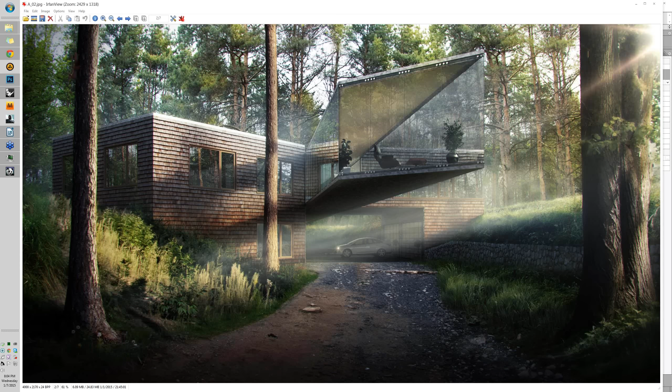Okay, so here's the model, which is already prepared for the final rendering for myself. Some of you ask me when I feel the model is ready for the final render and post-production. I would say, depending on your post-production skills, it can be right after creating a simple box in clay.

It really matters what you need to reach in post-production. You can always go in two ways: one is a full 3D approach, the other is a full 2D approach using post-production. There are several leading companies doing this.

Some companies are doing mostly 3D. You all know these people - like Bertrand Benoit, Marek Denko, Juraj Talčík, Peter Guthrie, and so on. On the other hand, there are other companies creating amazing visuals where most of their work is done within Photoshop post-production.

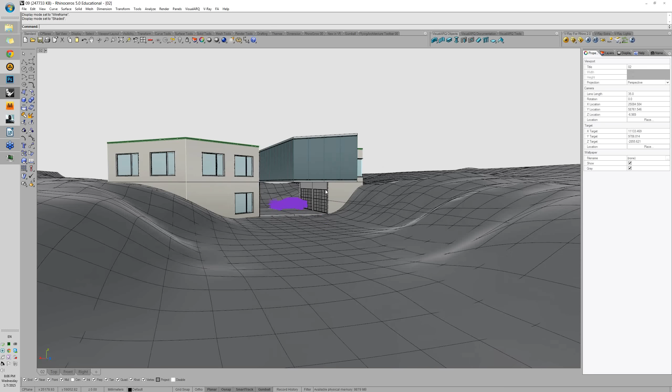So it's really hard to say which way is better, and hard to say at which point in the work it's better to stop working in 3D and start working on post-production. You really have to feel it in your workflow. You'll have to try creating several visualizations, mostly in 2D, mostly in 3D, and compare if it's better to add 3D trees or 2D trees. It really depends on you and your skills.

I will show you in our session how to avoid really long render times and how to avoid using a lot of 3D assets, using 2D assets from photos mostly in your visualizations.

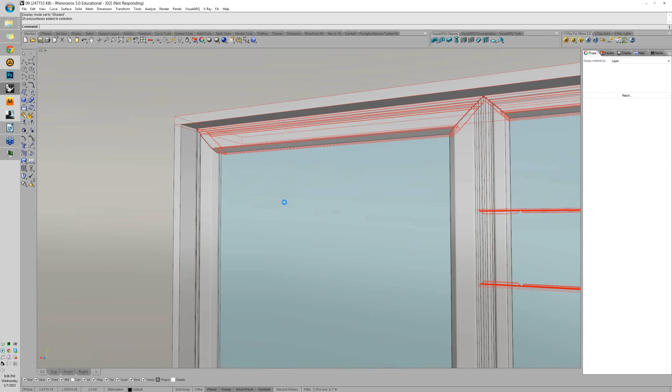But first, let me show you how we handle some of the basic modeling tasks here. For example, I decided to show you the windows, because I think they might be interesting for you, as we try to reach a lot of detail in 3D if possible - we never know when our client will ask for other views or a close-up.

So I'll just invert the selection and hide it, isolating this object within my 3D scene. As you can see, there is some decent detail created here. This is not complicated - it's very quick, very fast, and you can do it within a couple of seconds or minutes.

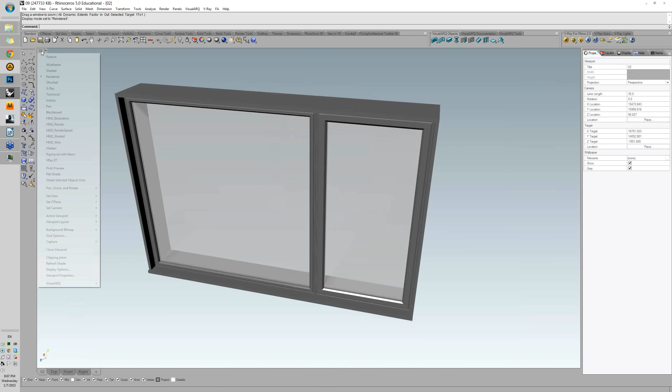Let me show you how you can handle such modeling in Rhino. So let's just create the outline for the window first. In this session, I will not care much about the real dimensions - let's just eyeball some of these dimensions. First I created the rectangle, which represents the outline for the new window. As a second step, I'll create the section for the window.

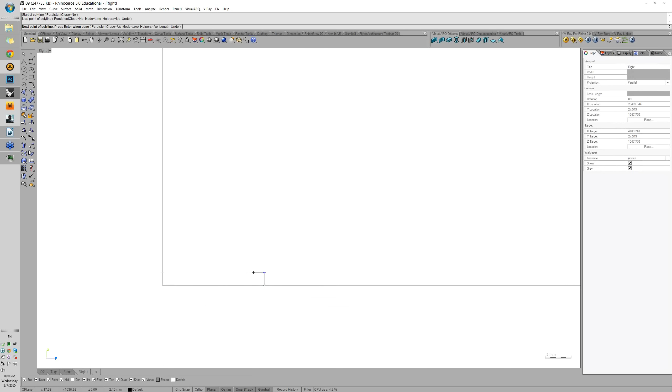Always mind, I have the project option enabled, which means I'm not drawing into 3D space, but staying in a 2D space. Okay, let's create some random detail. First it's okay to just have it like this, and then it's always possible to edit it later. If you enable the control points by pressing F10, you can select and move any of these points to edit the shape at any time, so it's really easy to edit later.

As the next step, it's important to add some fillets, because we want nice specular reflections on the edges - otherwise we wouldn't get these reflections. So we'll just use the fillet command. Anyway, as you can see, I'm using the commands.

It's quite faster for me because I was migrating from many 3D softwares I used before, like Cinema, Blender, 3ds Max, SketchUp, and so on, and these icons are always misplaced in different versions, or even different versions of the same software. So this new software layout in Rhino 5 isn't really important for me, because I mostly use the command line and try to type the commands. So I take the fillet.

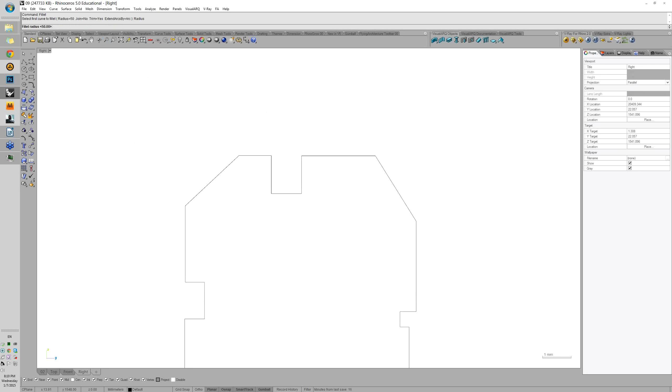Okay, as I can see, I chose a really big radius. Let's go with 1 and 0.5, so I'll just create some more fillets in here, like that, and so on. This is how you create these fillets.

Why is that important? I already told you - it's to get the proper reflections and proper detail.

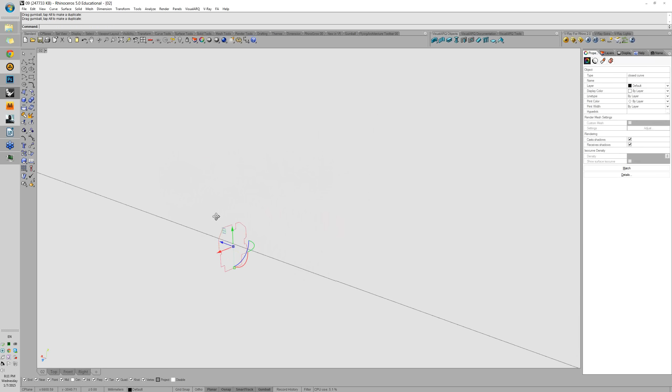Let me move the section in here. As I can see, it's downscaled, so just make it a little bit bigger so we can see how it works. Always try to keep the real dimensions, so this should be like 10 centimeters high, while the window should be maybe 1 or 2 meters by 2 meters or whatever.

So let's take the section and move it, disable the project, and move it somewhere onto the outline. As the next step, we are going to create a sweeping command - sweep 1. So we will take the rail, which is the outline, and select it.

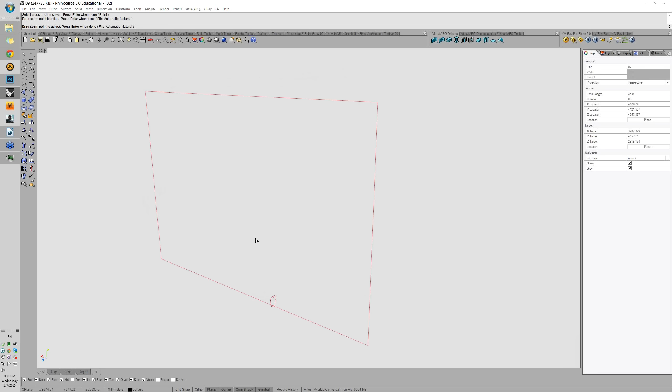Then it's asking to select cross-section curves - it's this one, as I told you. So select the cross-section curve, OK, OK, and hit OK. That's almost it for the window, of course.

If you go to rendered mode, you can see we are already getting some nice detail in here, which would be good later for the rendering.

Let's go back to shaded, and if you have a look in here, if I delete the section curve, I can still see there is a seam of the surface. So what happens? Let me also delete the outline, the curve, delete, okay.

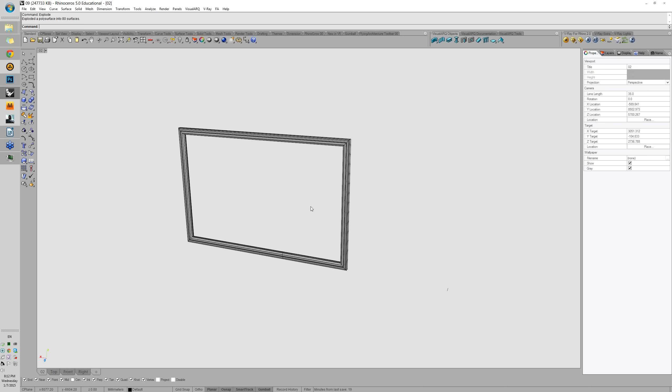So what I have in here is a closed poly surface, which is really important. What happens if I explode this poly surface? I'll get a set of surfaces - vertical surfaces in here, in here, in here, and in the bottom it's split in this part where I had the section.

So what I usually do, as I want to keep the model really clean and nicely editable, I just delete the bottom part. Then I join the top part, join the side parts. As you can see, it's already an open poly surface, all of them.

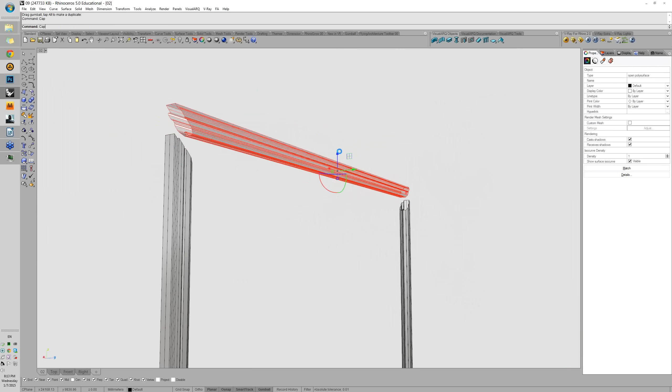As the next step, I can use the command which is called cap. If I hit cap, you can see it became a closed poly surface. So once again, if I go back, move it up, and use cap, as you can see, the cap was created - to close the surface, and it becomes a closed poly surface, and the same with the sides.

And as the last step for this window frame, I'll just mirror it using the middle point in here - it's in here, like that. So it's recreated back in here without the seam which was there when I created the first frame.

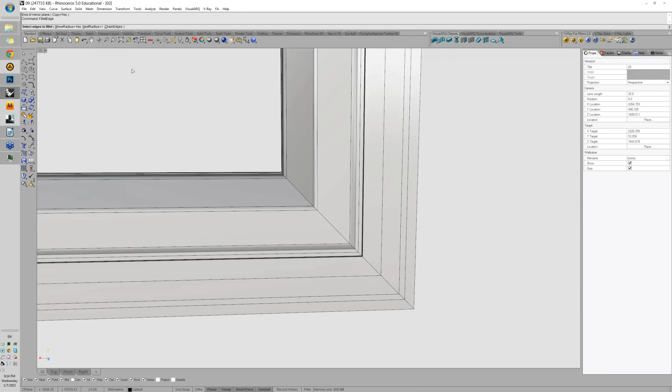Okay, as the last step for this frame, there would be the next step, which is filleting the edges of the connection in here. So let me use the fillet edge command with the radius of 1, should be okay. Let me try that one. I guess we don't need to fillet it in the middle in here to create an artificial detail inside, so it's okay just to leave it here.

Depending also on the details in here, it should be done flawlessly. Let's see - okay, it's auto-save, and I'm creating the scene inside the original file, so maybe it takes some time, which I'm sorry for.

Sometimes it might happen that you get some problems in these edges, as for example, you may use a really large radius for small details in there. In that case, it's okay just to lower the radius, let's say to 0.5 millimeters and so on, and try it once again, and it should be done flawlessly.

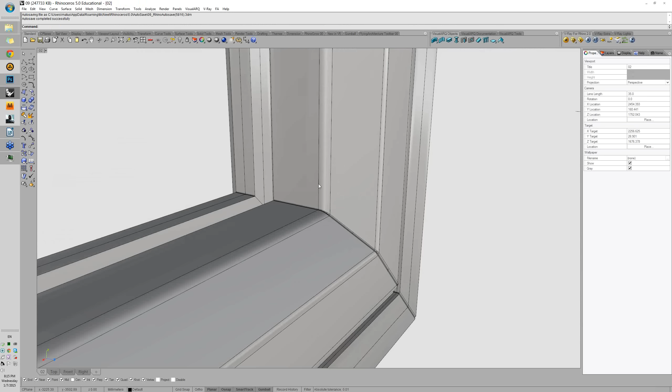It's always good to check out the surfaces if it's a closed poly surface. This is a very important part, and the reason why it's important is that if we do not have a closed poly surface where it should be, we would get an open poly surface, meaning that poly surface would have some holes in itself. We do not want holes in the poly surface, as there would be some light bounces coming inside the object, causing not really nice effects in the rendering, like light splotches leaking, and it would happen around the edges.

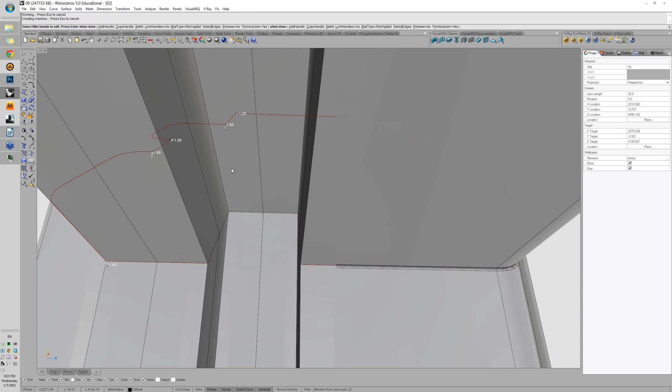So always select the object, always check out if it's a closed poly surface, and only if all of the objects in the scene are closed poly surfaces, then be satisfied with the scene and go to the rendering, to avoid all these unnecessary problems you may get.

Okay, let me see the rendered mode. As you can see, the detail is already pretty nice - yeah, I would say I'm pretty satisfied with it. And as a last step, it's okay just to add the window inside and the glass pane, so let's just create a simple box, get inside.

Okay, like that, put there the glass, and it's done. If you just group these objects together, it's easier for mapping later on. I'll show you also directly how to map groups like this for better detail.

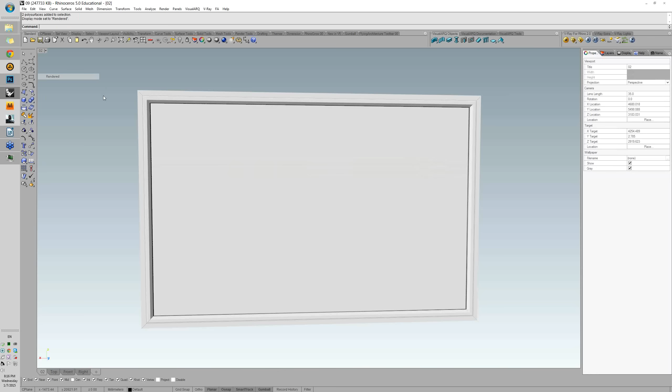Let's go back to the render mode. For the glass, I'll only create a very simple Rhino material with some transparency in it. I can see it's already transparent. Let's see that in there. Let me apply the material. It should be, yeah, okay. Shade it, I'm going to show.

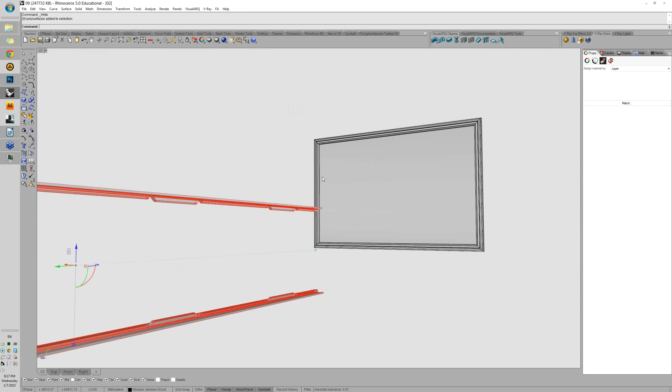So I'll just take the material from here. Okay, it's layer. There's a really nice icon in the latest V-Ray release. There's this tab called V-Ray Extra, and there you can see this icon which says V-Ray Edit Material. That means if you select the object and click on that icon, it's going to take you directly to editing of the material itself. So let me just click on the icon and select the object. Okay, I want that one.

And as you can see, I'm already in here. So let me just hit preview. I just want to make sure all of my textures are okay. Seems okay, so let me just hide this part. And if I select the frame and apply the material to selection, I'll make sure it's working in rendered mode. Okay, for some reason I cannot see it.

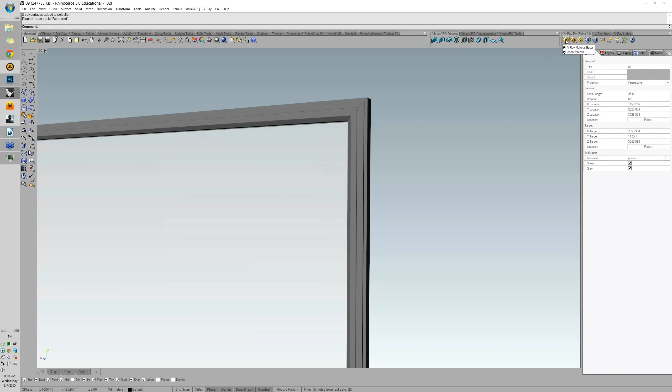Oh, I know what's happening. The reason why I cannot see that is I've got not a simple bitmap in here, I've got a color correction where I'm desaturating the texture. So first of all, I'll just create a simple bitmap material, just the standard, and I'll take the location from here.

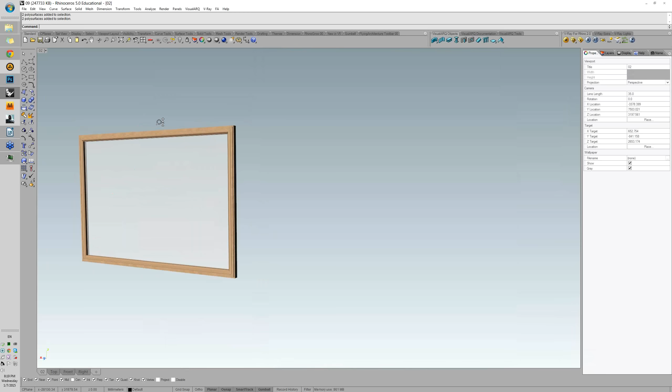Okay, let's go back to the diffuse bitmap. I'm going to take the texture. I'll select again the frame, apply material to selection. So as you can see, the material is working now, but the mapping is wrong, of course.

So as the next step, I'll disable the isocurves, so I just remove some of the lines in here and keep only edges. And as a next step for mapping, I'll create the box mapping. It's pretty easy, just create a box, doesn't matter how big it is, we are going to change it.

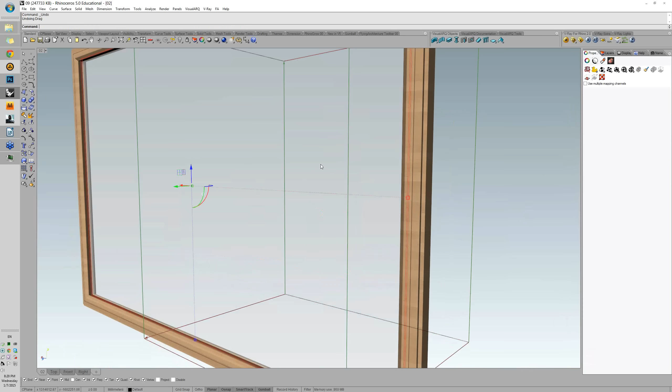Select these vertical lines, then click on show mapping in here, so it's going to show you the mapping widget. And now, as you can see, you can freely move it, and the texture on the surfaces is moving with the widget in real time. So you can easily rotate it, and as you can see, we are already getting some nice and realistic mapping.

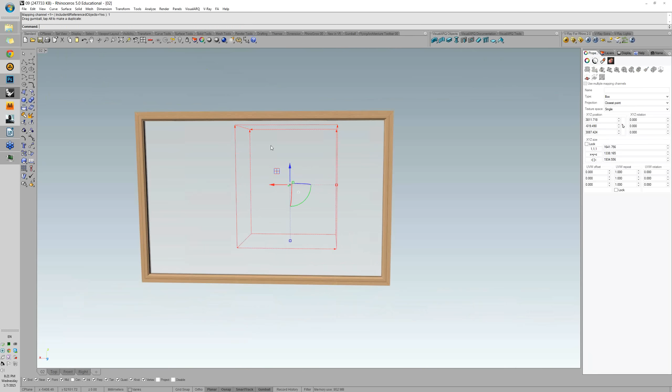On the windows, okay, this should be maybe okay, but as I can see there is some seam in the texture there. So let me just scale it up a bit, move it down. Should be okay now, let's see the surface. Okay, looks okay now. By hitting escape, we just cancel the widget while the mapping stays as we set it up, then just do the same for the horizontal lines, take it in here. Okay, this should be okay, just scale it up. Let me check it, okay, it looks okay.

So using this very simple method, in a couple of minutes you can create really nice detail for the visualization, and even if your client asks you to make a close-up, let's say through the window, you don't have to be ashamed of the really simple geometry you've got there. As you could see, with really simple steps you can make some really nice and detailed models.

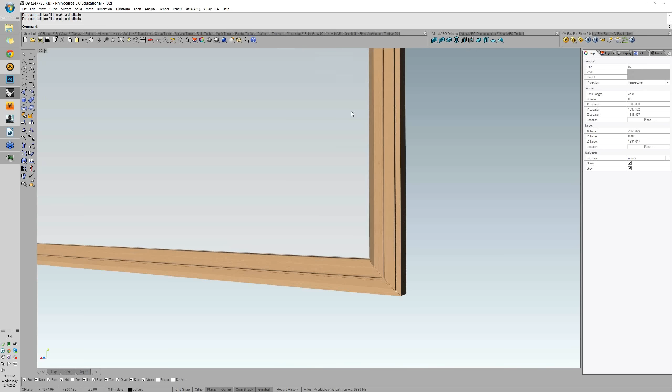Also, if you just want to quickly adjust the size of the window, remember, never scale the windows up or down, never scale these frames, because if you scale it, these vertical lines are going to get distorted since it's scaling them in one direction. So how do you avoid this?

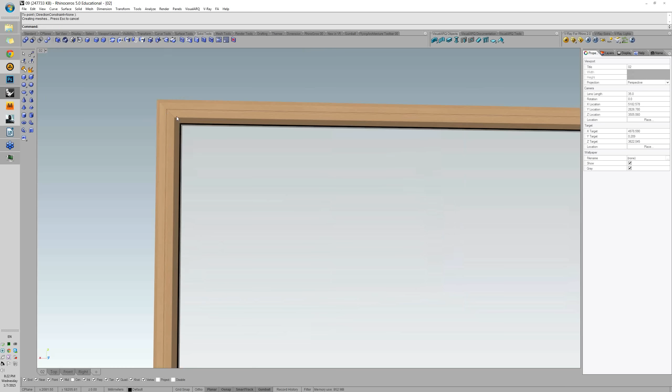Go to the top view or front view, whatever, and go to this Solid Tools panel, and there is this little icon which says Move Edge. So if you just select the edges and move them to the new location, the window gets shorter and all the proportions are kept the same. So remember to use Move Edge, and never ever scale the windows up or down again, you're always going to get distorted geometry, which is not good and not realistic.

Okay, so this should be it about some details in the model. I'm going to delete it. Going back to shaded mode, I'll show you how the model looks like again. As you can see, there is some repetition on the cantilever in here. How is this done, and how can we keep the efficiency while creating something like this?

Let me just copy one of these glass boxes out of the place like this, okay, and I will move it up as well, like that.

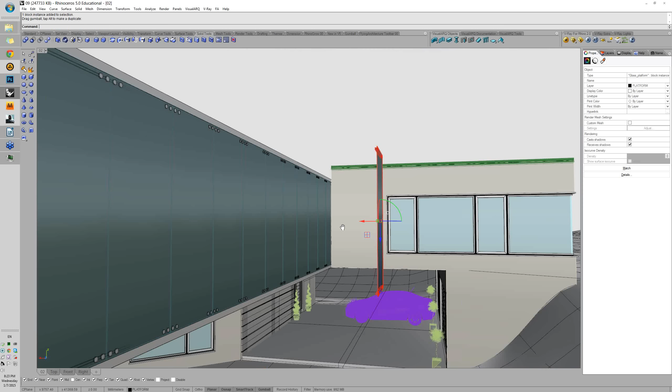Right now I use the command which says block edit. That means all of these objects in here, all of these glass panes around the cantilever, are blocks. Whatever I do with this single geometry is going to be applied for all of these glass panes. This is very important for me because when I was creating this project, I wasn't really sure how the cantilever was going to look in the end, and how this mounting system would work.

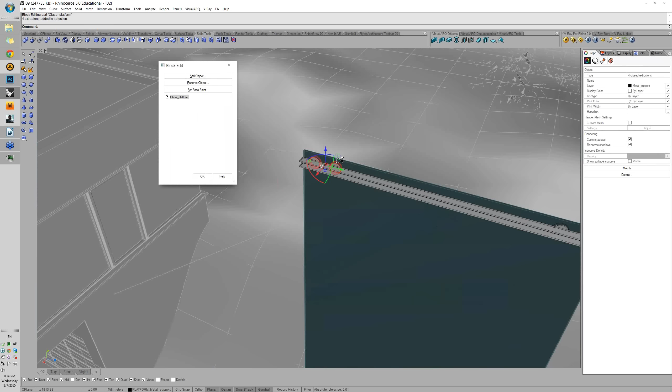Let's say I don't know it yet, but I can still play with it. So for example, if I want to make it a bit different, I'll take these volumes in here and move them into the middle. It's not really important what you create in there. You can create a new geometry, remove the old geometry, and so on. I'll remove these ones so you can see that. I'll remove these, delete, and hit OK for the block edit pop up.

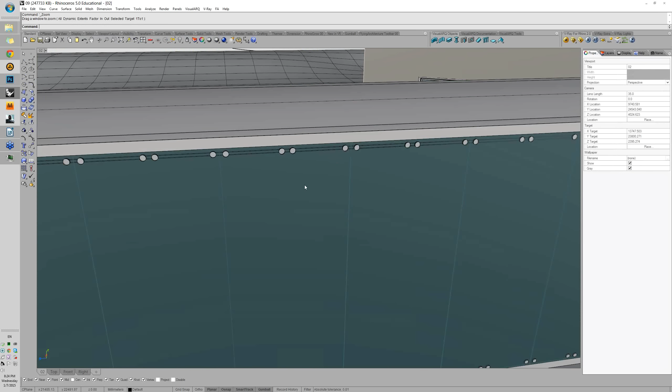And as you can see, all of these geometries were updated. That means the unnecessary volumes from the edges were removed, and I got some new volumes into the middle. So in this way I can really flexibly change anything at any time.

For example, if I already created the final rendering of the scene, and just then I decide to change the system of mounting these glass panes, I can always do that, and it's not a problem. And for example, it's also good for one case.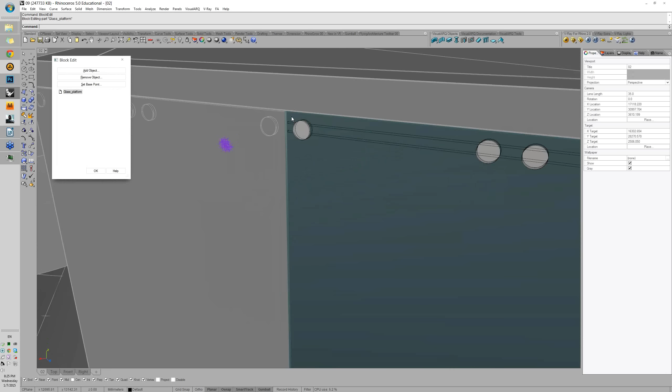Let me block edit once again. So if you've got a problem with the performance of the computer, and let's say you're creating the scene on your laptop and it's not that powerful, remember to use a lot of blocks and to use them effectively. For example, for filleting and chamfering edges.

As you can see in here, I did not use any fillet or chamfer because I knew I'd be working with the scene for a couple more days, and I'd keep adding details, so I didn't know how much detail I would add. So I decided to keep the geometry simple and add the fillets later on, which came back to bite me as I forgot about it in the end.

So that's why I can fillet these edges right now. I'll use just 1 millimeter — sorry, not these edges, only the glass pane. So at any time I can fillet the edges and add the detail. You'll be able to see this also in the post-production, which I'll open shortly.

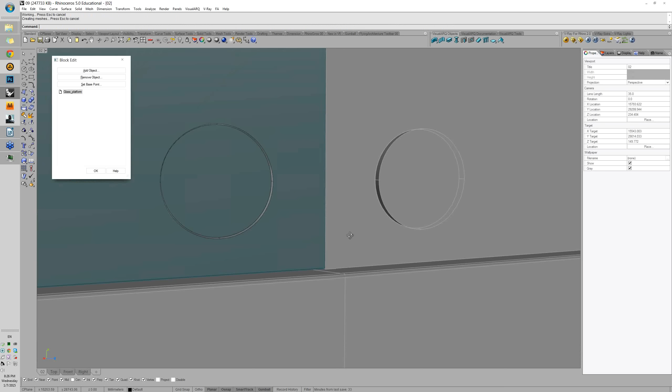I had to create the spaces in between the glass by hand in post-production, because I forgot to create the fillets in here. So let's hit OK, and as you can see, all of the other blocks were updated as well. I just created the detail only for the final model, which I didn't have to wait for while creating the scene.

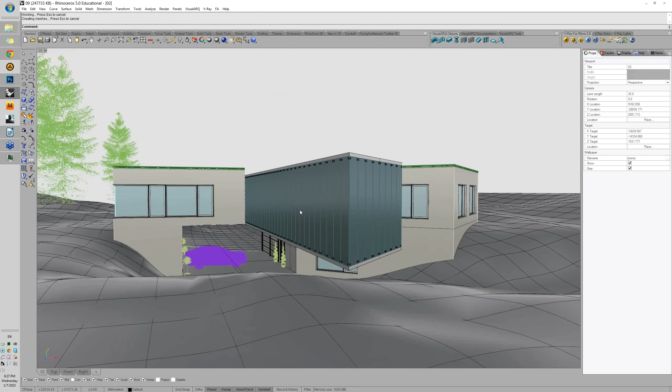As you can see, there were some questions about the cantilever, that it's not realistic — the architecture would not be able to handle such a large cantilever. But I'm asking these people if it would be fun if we only did possible architecture. I don't really think so. That's why we also created some flying houses, because it's just fun to create. This is just a personal project, so why not play a bit with it?

Anyway, I had some concept for more views of the house, where I wanted to approach it with a photographic approach, and I wanted to match some edges together. If I hide the ground in here, you'll see that I wanted to match some edges together, so the cantilever always matches one side of the house, like that, as you could see. So this was the concept.

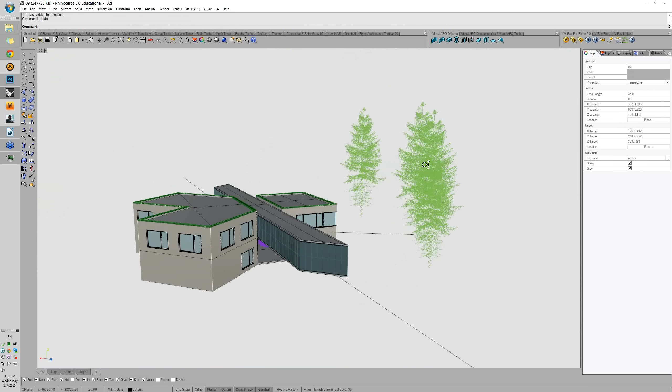Anyway, let's go back to modeling. As you can see in here, there are some conifers. They look kind of weird. You may ask why — the reason is these are proxies. These are not the real geometry in here, and this geometry won't be rendered like this. I'll show you what's going to happen. Oops, sorry.

I'll ungroup it. Okay, so I've got the tree separated, and if I hit render, let's see what's going to happen.

Instead of these random triangles in a viewport, you will see a complete tree. So what's happening in there?

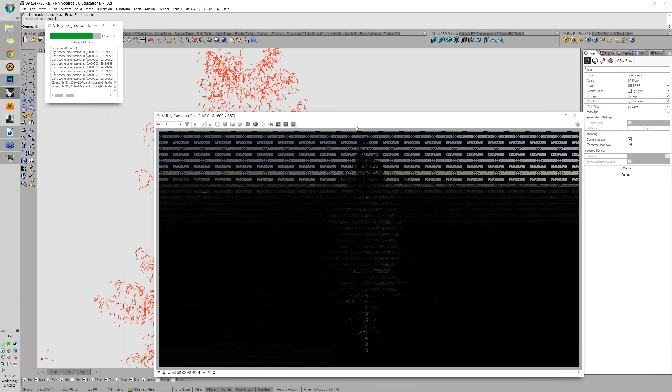It's reading the tree from the external reference, so that means I don't have to load these millions of polygons into the viewport. I'm pretty sure most of you are really familiar with proxies, and you may use them a lot.

I would just like to give you a suggestion. Always try to import the geometry into the scene, check out the rendering, if it's going okay, if all the textures are fine, if the materials are applied correctly, and just then create the proxy object.

How is it created? It's very simple, of course. If you have the geometry in here, let's say we have a sphere and we want to copy it 1 million times in the scene.

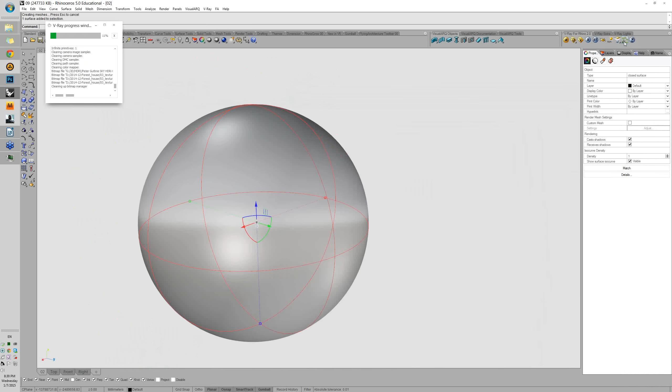There's this little magic button which says import V-Ray proxy or write V-Ray proxy. So with the right button, I'll just write it. I'll save it as a sphere. Okay, it's asking me some options in here. I'll just click OK for now.

And as you can see, the sphere was replaced with this fancy object. But if I hit render, you'll see how I can see a complete sphere in the rendering.

And this is a really nice thing to optimize the scenes. Recently, like 2 or 3 days ago, I finished the scene with a small skyscraper where all of the geometry behind the windows was real in a viewport. I mean, all the beds and dining tables and chairs and sofas.

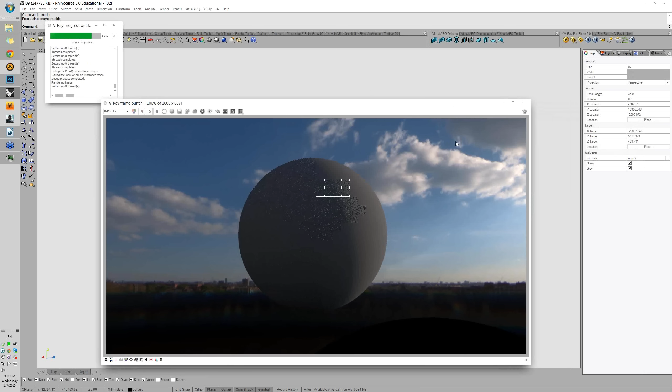These all were geometry in a viewport. Of course, without proxies, it wouldn't be possible at all. So that's why I had to create proxies out of all of those objects and place them behind the facade.

Okay. What is important for the rendering? There are many factors you should be aware of, of course, but the internet is full of these tutorials

and these step-by-step tutorials. So what you should follow, what not to forget to enable, disable, and so on. So you can just find this tutorial.

I'm not going to waste this precious time because we have only 1 hour for this webinar. I'm not going to waste it on V-Ray options because there are tons of options you can set up. Very important for you guys if you want to work on serious post-production is to enable some render channels.

In this case, I enabled all of them, but of course you don't really need all of them. So in the end, sometimes I just deselect some of these and I don't work with them anymore.

So if you just hit the render button, oops, I didn't mean to run the render now, but never mind.

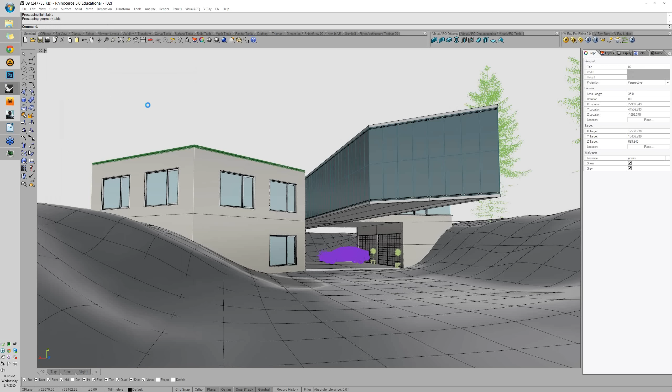Okay, let's wait a minute. Okay, what is important is to check that all the render channels you selected in VFB channels in here, they

are all loaded in here, and you can always switch between them while rendering, so you can check if these channels are okay, if you need to adjust something, and so on.

For example, if your render is noisy, you can always check out, let's say, the reflection channel or GI channel, to see which of them is noisy, and then you can go back to the scene settings and adjust either the global illumination settings or the reflection of materials and so on.

In this case, I'm not going to wait for the render and I'm not going to check out these problems. I'll jump directly to Photoshop and I'll show you some tips and tricks over there. So let's cancel the render. Oops.

Let's go to Photoshop. So what do we do as a first step when opening the post-production in Photoshop? We go through File, Scripts, and Load Files. So, Scripts, Load Files into Stack.

I remember a couple of years ago, I'm not really sure if Photoshop already had this option, but I was loading them manually, channel by channel, into the canvas. So it was quite time-taking.

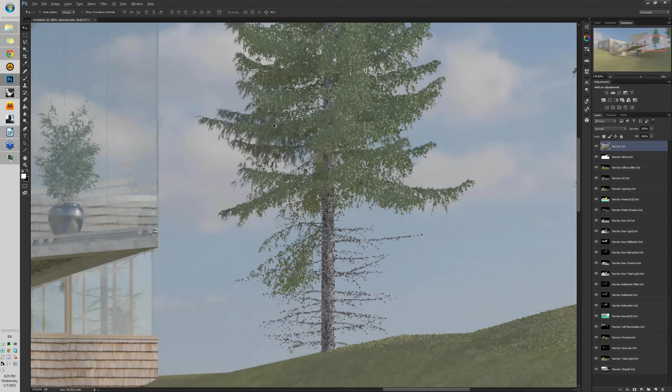So as you can see, there is still this gradient map rendered and not the final rendering. There is the alpha map in here, which was rendered later.

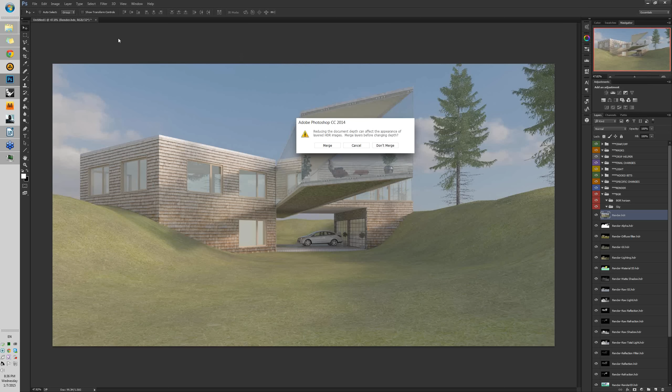Turn that off. And as the next step, it's very important to go to image mode and 16 bits, because we are still in 32 bits and we want to use all the options of Photoshop. Right now Photoshop is not offering me all of the adjustments. If I want to access them, I need to convert the rendering from 32 bits to 16 bits.

So let's do that. I don't want to merge the scene. Okay, so it's in 16 bits right now, and as you can see, I can already access all of the adjustments.

As a first step, I'll just categorize these layers into folders, and I take the files and move them to masks. As the next step, I need to use the exposure adjustment, and I need to set the new gamma correction value from 1.0 to 0.45, which is done after every single import from rendering.

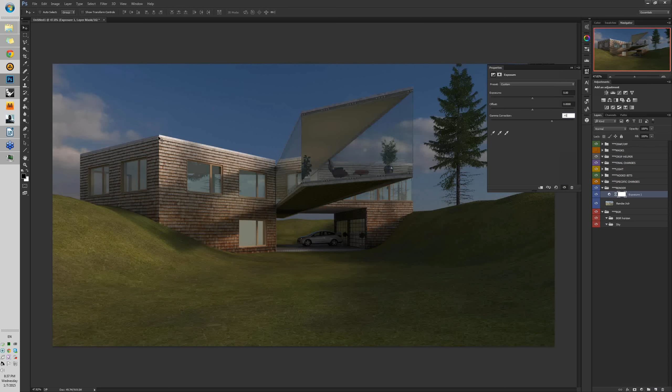This is getting our render back to the values as it was in the V-Ray frame buffer. Once this is done, we can just play with the other adjustments. Sometimes we just need to enhance the light or increase the contrast, brightness, and so on. It doesn't really matter right now.

In this way, you can really easily adjust some very important details. For example, if you check out this part, the wooden shingles are a little bit burned right now. So you can use post-production with a bit more sense, as I did with these two adjustments.

Just delete it, and when creating the curves, don't overdo that part of the curve. Just increase it a little bit so you don't lose the detail in there.

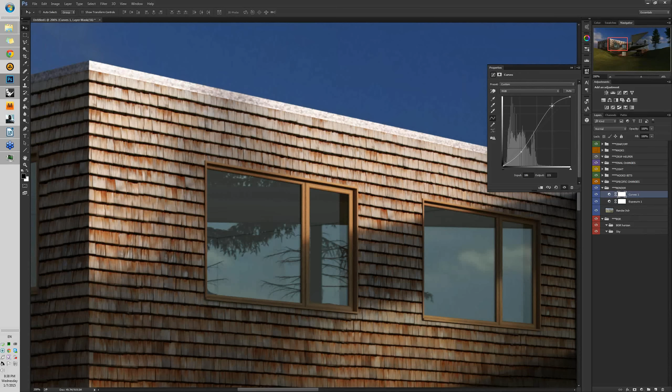As you can see, I rendered the facade with displacement just to get a really nice detail, as you can see here next to the window frames. To be honest, we don't use displacement at all. This is a very rare case of using displacement in our works. We usually try to avoid using dynamic geometry like displacement or proxies and so on. But in this case, as it was for the tutorial, we used that for the facade.

But mostly, this would be easily replicable with some basic post-production steps, like, for example, masking a bit of the wood texture in there. The reason we would choose post-production over rendered displacement would be to save time, because displacement and proxies prolong the rendering, of course. Some of you may not have time for waiting, or they just don't like these effects and so on.

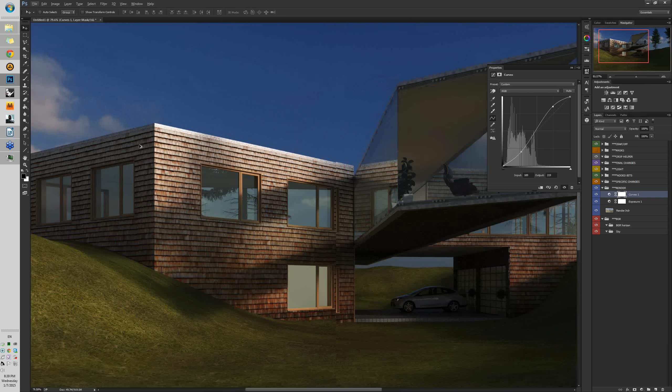Okay. What is also important for you as CGI artists is to have a lot of photos. For example, in our case, I've got a folder called Photos, and in there I've got categories like nature, skies, people, road, and so on. In these categories, I've got subcategories like grass, forest, field, and so on. This is always done for better access and faster finding of the proper texture.

So, for example, if I want to use tall grass, I'll just go to the folder called tall grass and use that one. You can easily move it to Photoshop, or move it directly to the scene, or move it in here and then copy only the needed part. Just copy it.

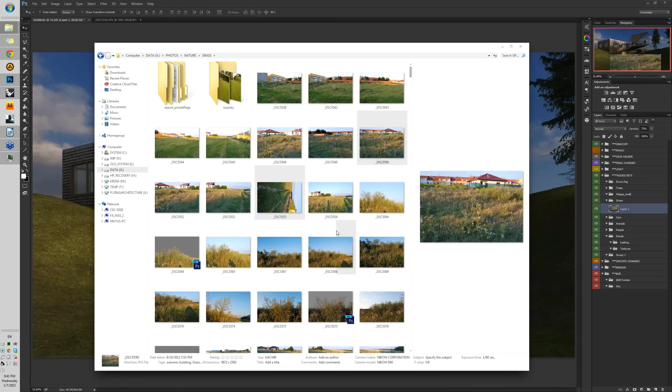As the next step, it's important to select several photos. In this case, there are little slopes in there, so I'll be forced to use some more photos. I'll need to find some more photo references which are suitable for my first concept in there. I'll show that to you in the post-production in the other file. But what is really important is proper masking of the photo.

So we'll just create a mask, and as a first step, I can take the basic brush. I'll remove the edges, so with full opacity in here, I'll remove the edges like that. If you want to recreate the edge to look more natural, you'll have to select the proper brush.

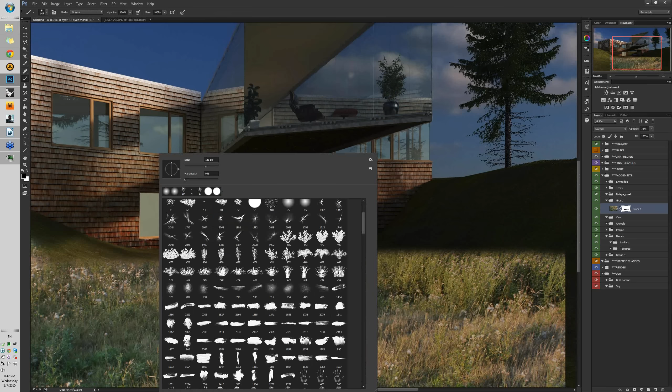I already imported some brushes in here. If you want to know how to create your own brushes, like this, there's a tutorial also on FlyingArchitecture on how to create these brushes. Feel free to open it up, it's for free, so you can follow it and create your own brushes. What's important when we create a new layer in here is to show you that if I create the brush tip, you can see it's always the same.

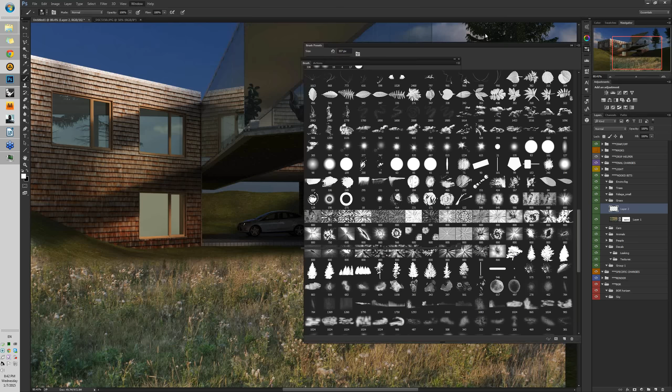This is not something we want. So if you select the brush in here - sorry, I'm somehow missing the brush. Okay, this is it. So this is the brush. And if I make a brush stroke, as you can see, it's completely uniform, and this is something I don't want.

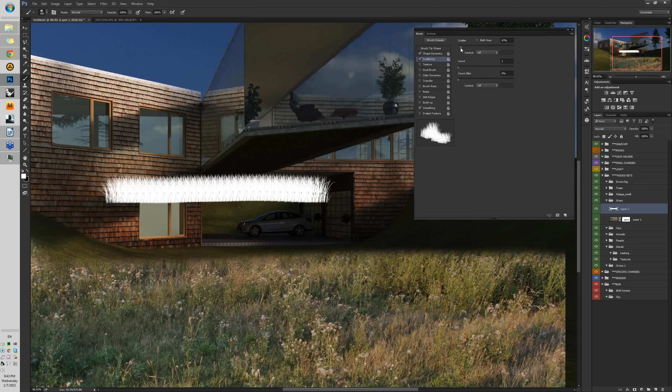First of all, we need to enable shape dynamics and scattering, which isn't working by default because it's not accepting the fact that I've got my tablet connected to the computer for some reason. But anyway, you can increase or decrease some sliders, like size jitter, minimum diameter, angle jitter, and so on. And for scattering, you can enable scattering and play with the count. If you create the line again, you can see the brush is already scattered.

So this is how you create the edge for the grass, for example. Let me delete it, disable the layer, go back to the mask, and as you can see, I can already paint the edge for the grass. Let's say like that. This is a very simple approach which can be used for creating these details.

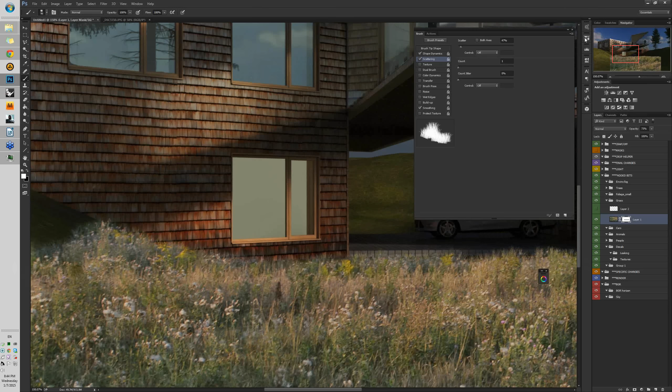Of course, there should be more photos to be placed in there, and also not the best photo was chosen to be placed here because this is supposed to be the road in here. So let me just open the file which is dedicated to post-production in here.

And I'll show you also how to work with the adjustments, which is more important for the post-production.

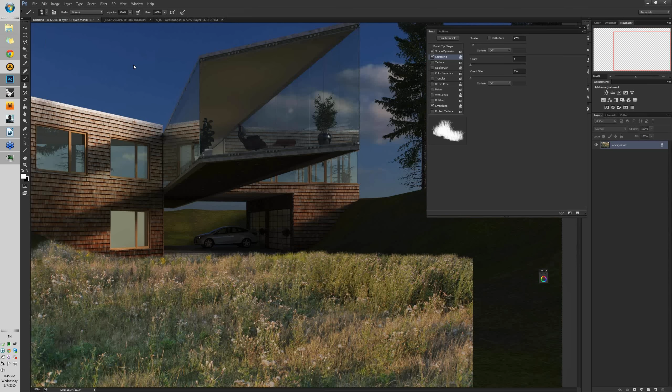In this case I selected the photo which isn't really suitable for this position, because of the perspective, but what's more important to know is that you should always keep in mind that the sunlight should fit the rendering. In this case, as you can see, the sunlight in the photo is coming from the left side, while the sunlight in the rendering is coming from the right side. So in that case, I'll just transform it and flip horizontal.

This should work for some cases, maybe not for this one, and you would also need to create some adjustments. Flip it so you can fit the colors. As you can see, it's already better, but it's still not quite it. So let's go back here.

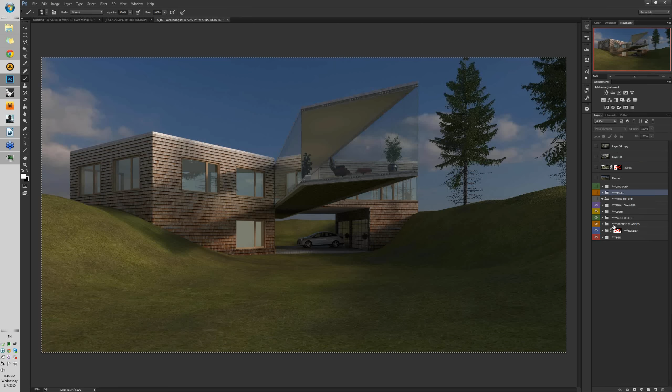So this is the rendering which was created from the scene as I showed you before. And what is really important as a first step, when the gamma is corrected, go to masks, take the alpha and copy, and you'll have to create the mask.

So just create the mask for the group where the rendering is situated. Click into it, paste it in there, and it's masked. And as you can see, behind the group which is called render, I've got the group which is called background, and that means all the trees in here in the background can be still moved in any direction, in any way, okay.

So this is the really big advantage of Photoshop post-production, that you can play with any channel at any time, with any layer. You can move it, scale it, remove it, and so on.

Let's have a look quickly at what I did in here. By the way, usually for our post-production, there is a really extensive variety of tools used, like a lot of edit layers like grass, trees, and skies and so on, but there are a lot of adjustments for each of these layers. Just don't be scared when you see the structure like this, because it's very, very simple. It might look complicated, but I will show you it's really simple.

So once you create the basic structure with the render in here, and you adjust the exposure as I showed you in here with 0.45, then you can start playing with some adjustments.

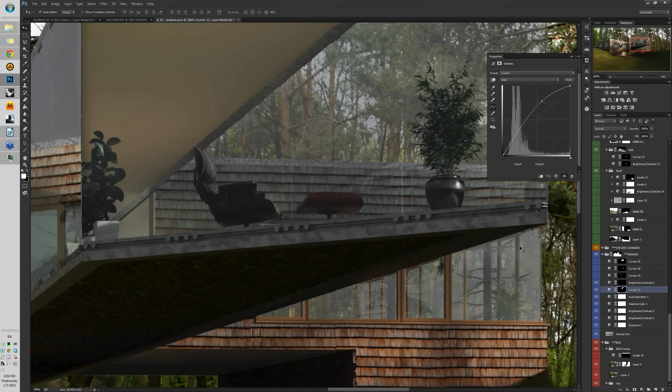With a brush, I painted the adjustment layer in here, so it's the brightness. Then there are some curves, which are mainly the reflections in there, and some other adjustments.

These are some basic adjustments which are used, let's say, in general. These are not applied to a specific layer of post-production. These are applied for the complete rendering, which was done in V-Ray. And right after that, this doesn't have to be perfect. Right after that, we start adding the assets.

As you can see, there are a lot of them, but I'll show you quickly how it works. So you don't have to worry also to experiment with the layers. Don't worry to load there a lot of photos and try which of them is correct, which of them suits better the rendering. So first of all, as you can see, I imported this photo, which is some kind of a road in here with the grass on the side.

I was quite satisfied with it, so I created the mask and I removed the unnecessary part in there. First of all, I thought, okay, I'm fine with it, and in here I'll just add some, let's say, a bush or something, I'll add some more asphalt in there. It's not a problem. But then I realized, okay, it's a good road, but considering this is a forest house, there should be something, you know, more natural, not this way.

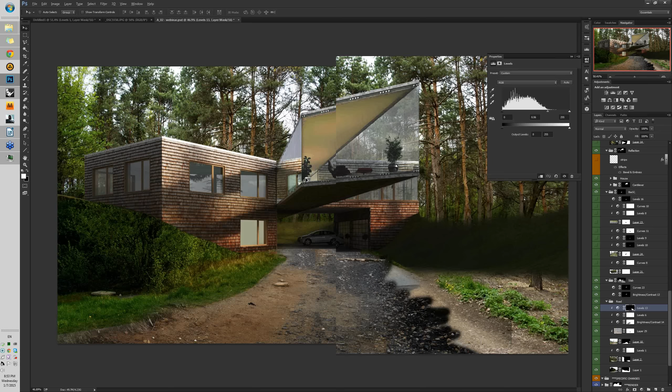Right now I enabled some adjustments for the bottom of the slab because it got rendered pretty dark and I needed to create some light in there. There's this displacement rock texture, for example, here, so you can see that. It's the same one as in here, but it doesn't look that nice. Never mind.

So as a next step, okay, what is also important, once you bring in any texture, I'll just disable this clipping in here. Now once you bring in a texture and you want to fit it directly to the environment, and you can see it's lighter or darker, you'll have to create some adjustment.

So in this case, let me create the levels, and as a very first step, always remember to create a clipping mask. That means you will clip this adjustment only for the layer below, which means there is this little icon in the properties. So if you click that one, you can see there is this little arrow added in here, and that indicates the adjustment will be used only for the layer under it. That means if I move the slider, I'm adjusting only the layer below. So this is how it works.

What you can also do, you don't have to click this icon. You can also go with your mouse pointer in between these layers, hold alt, and click in between them, and it's clipped again. Okay, so I'll just remove it and I'll enable these clippings back again.

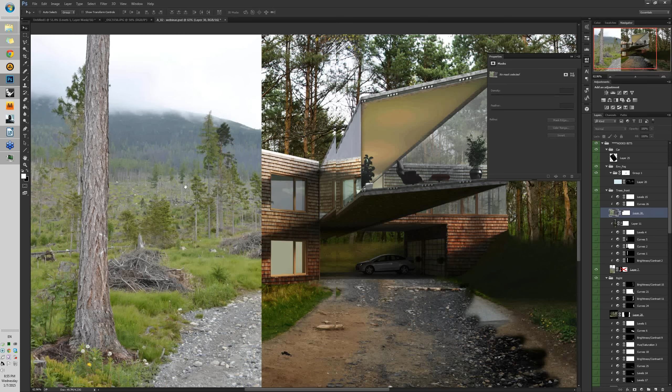So the trees. So once we import the photo, the original photo looks like this. Again, this is the photo from High Tatras by Lukáš. What I usually do when we have some sunny photo with a lot of blue sky behind the tree and behind the tree line, I use some simple tricks which can be found also on FlyingArchitecture, how to mask the trees out of the photos.

But in this particular case, I couldn't use these quick adjustments to create the mask automatically, and I had to do it by hand. So what was the easiest way for me?

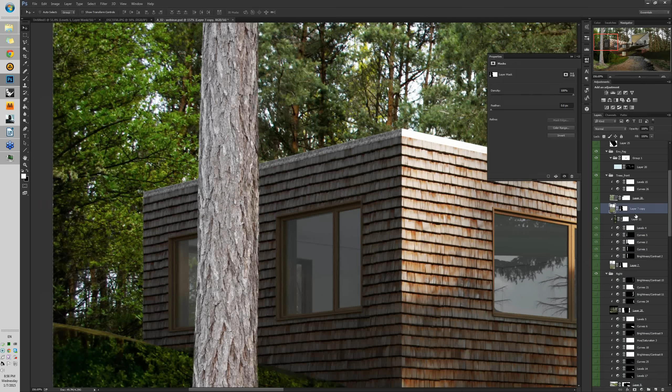Let me just duplicate this. So it's duplicated. Let me remove all of these adjustments. Delete. Let me remove the mask. Delete. So as you can see, this is the original photo and nothing special.

So if you have to mask these things just by hand, create a new layer, place it under the photo, fill it with like 50% gray. Go back to the original photo, create the mask, take the brush, and you can try out how the masking works. Okay, this should be okay. We are creating the mask in here. As you can see, by holding alt and clicking into the mask, you can see how the mask looks like.

So let's get back to the photo. And let's adjust the brush. So, window, brush.

We are going to pick a basic brush from here, which should be located somewhere in here. Okay, there are a lot, yeah, in here. Is this one? It's a basic Photoshop brush. I think you all should have this one in there. So first of all, as you can see, this is a preview for the brush.

First of all, you can just rotate the brush so we narrow it, as you can see right now. The edges of this brush are still really narrow and smooth, and we don't want that. So let's just create, again, shape dynamics, scattering, and move some sliders to the right.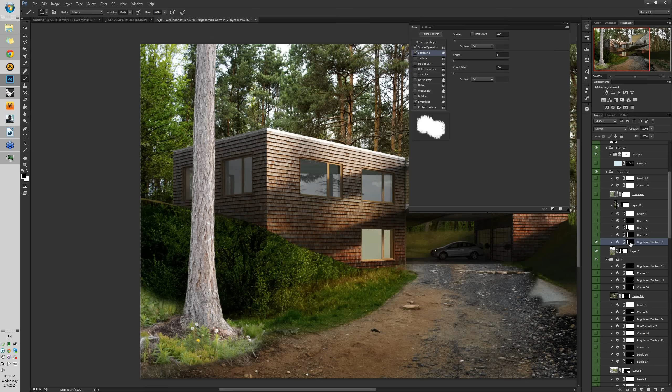It's because there was the sunlight coming from the right side, and I want to fit the tree into the environment. So first of all, have a look at the brightness. I created the right part of the tree a bit lighter. If I hold Alt and click into the mask, you can see there is this blurry edge, which shows the transition between the part where it's appearing and not appearing is blurry. So if I zoom in, enable and disable it, it's nice and smooth.

And the very same thing for the curves. These curves are making the bark on the lighter side a bit warmer. As you can see, the original photo is not corresponding with the color of the facade, which is nice and warm from the sun. So I want to match it also for the unlit side of the tree. That's why I used curves for that.

How I reach that effect is through the drop-down window in here. I switch to red, move the curve a bit up, and for blue, move the curve a bit down, so you can easily play with the colors. And again, I'm using the mask to use these curves only for the unlit part of the tree.

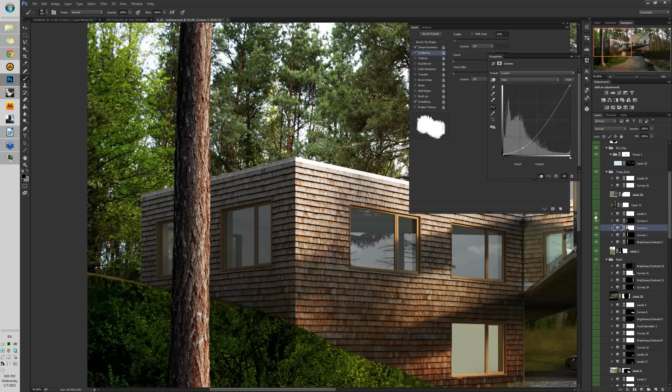Then I'm going to recreate the shadow of the tree with curves again, but in this case the mask is inverted, as you can see. If I click into it, you can see the colors are inverted. And then some more adjustments for some darker shadows, some levels to darken the tree much more. What is very important in here, I don't do that too often, but in this case it's just good useful.

I also added one more photo of this original tree to add some more texture to it and to create the light a bit more natural. So this is how the light for the tree was created.

And as you can see, the comparison between without the effect and with the effect, it's really visible. So you don't have to spend hours and hours browsing online to search for perfectly lit trees and grass and so on. You can always recreate the light in Photoshop. It's not that hard. If you are skilled enough, this could be done in 3 or 5 minutes, so you can do that with several assets and you are done.

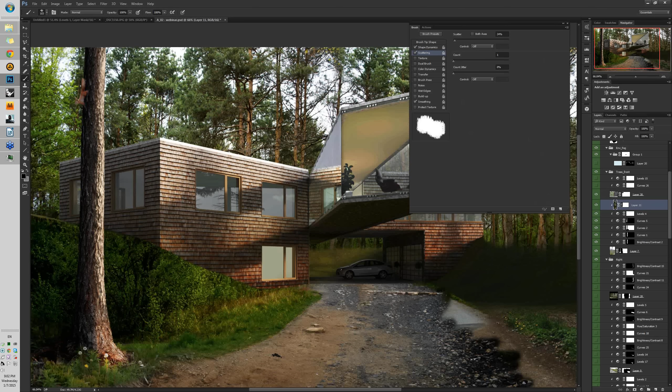As you can see, there is this little body in there as well, so some color adjustments. Okay, it was the tree in the front. If we enable the trees in the front again, it is this one. Again, as you can see, we enabled some adjustments and it fits much better. Mostly what is really important is this warm light coming from the right side.

Okay, let me enable the grass in here. With the levels I created, as you can see there's this mask which was created for the shadow part in here. Again, some shadows, some warm light on top of the grass, some brightness, some curves, hue saturation, brightness, curves, and levels in general. In this way, we brought the grass more into the environment by adjusting its appearance.

This is some kind of a stone wall I found also in our repository, with some basic adjustments like curves and levels. We just put it back to the shadows. And as you can see, there is this unpleasant part up here which we need to cover as well.

So there is another photo reference, and with the very same approach, we created the grass edge here, as I showed you before, so it's pretty easy to match it. And also what we only do is create a little bit darker part in the bottom of this grass here.

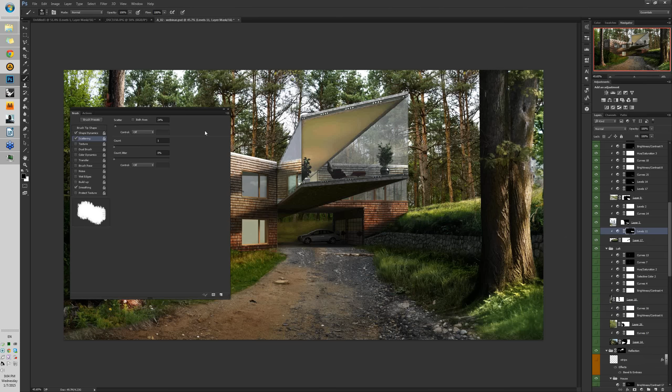Okay, let's get back to the left part here. As you can see, it's still not really nice, but we don't mind, we'll just add some more textures. Okay, this looks much better, mostly the right part, but I'm not still satisfied with the left part. So let's just create one more layer above it, and let's bring some color adjustments to bring it together.

As the last thing for the front part, I guess it's this tree, and again with the very same approach, with several adjustments, just create some light on it. Important for this one was to bring the realistic shadows from the cantilever. So as you can see, this shadow from the cantilever casts first shadow from the ceiling and second shadow from the floor in here, and I wanted to bring it also on a tree somehow. So if I enable the mask here, as you can see, I created the mask only for the unlit part on the tree. This is completely uniform, but when I enable the curves, the light is created only where it's supposed to be, and again the darks with the curves are created only where the shadows should be. So this is how I try to bring the tree to the position.

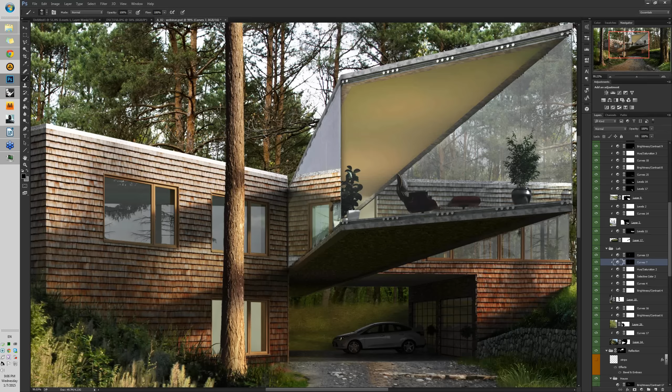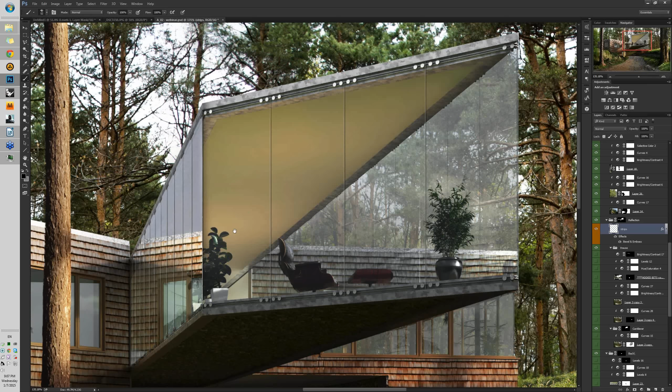As I showed you before, in 3D I used the fillet for the blocks, and I told you I forgot to create the fillet for my final rendering, so I had to recreate it in post-production. It was done in a very simple way, just creating some strips, some very simple lines, and then adding the effect of bevel and emboss. It's just a very simple effect. I know this is not the best way, but I didn't want to create a new rendering and wait a couple more hours for the render and edit the post-production again. So I just put a new layer, created a few lines, created this bevel and emboss, and it should remind you of the light and shadow on the glass panels.

When talking about the environment, it's always important for the house to sit in the environment, with the shadows and also with the reflections. The reflections in the windows are very important to match the environment, and you should always try to bring new reflections in Photoshop so you match it more properly.

First of all, there is this reflection coming from the right side here, with some adjustments, and there are some more reflections in the windows up there. And as you can see, the last reflection back here, and there is also the specific folder for the cantilever reflection, so there is some kind of texture again.

By the way, this texture, as you can see, is set to multiply mode, opacity 55. If you switch to normal and 100, as you can see, it's a photo from the background actually. I just moved it and rotated it a little bit so it doesn't fit exactly with the background, and in this way you can easily get the reflection. The multiply blending mode is not mandatory for you, you should rather experiment with it. This is not the only correct blending mode for the reflections, of course. I also tried several of these, and with multiply I decided this is the best one of those, but maybe for some other scenes, some other blending modes would be better.

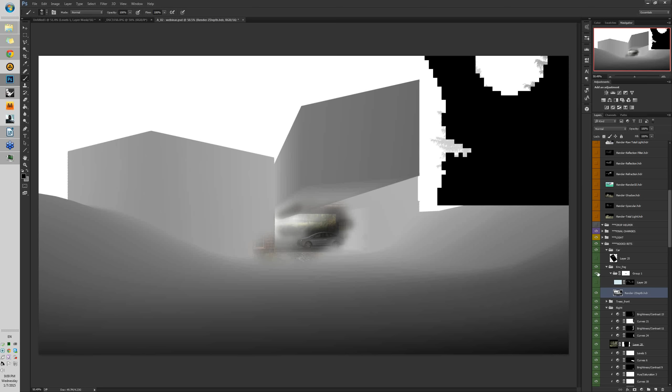This is the fog, the environment fog. There are two ways to create environment fog. One of them is you go to masks and take the Z depth and take it out. It's like this, and if you enable it, you can see, okay, like that. As you can see, it should work for what we need. The only thing is we have to mask out this part from here, or maybe you can just switch the color and paint the black, paint the white into the layer, like that. Okay, let's do that, so we just cover this part.

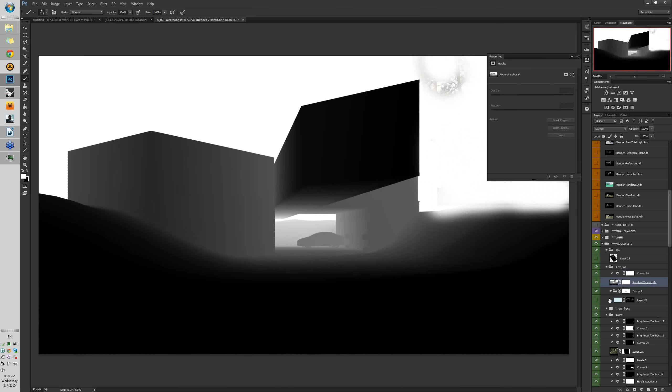Okay, as the next step, let's bring some more contrast to the image and flip it to the layer. Like that. And if you switch from normal to screen, it's going to filter out the black color, and it's going to be shown only where the white is. And if you lower the opacity, you can see it's somehow working.

It's not the best, of course, so that's why most of the time we create the depth just by drawing it into the empty layer in here, in the structure. In this way you can create, as you can see, not really perfect Z depth, but if you want to, you can at any time just create some mask, mask out some little problems in here, and it's going to work for you flawlessly, as you can see like that. This should work for you in most cases.

And let's say if we increase the contrast again, we can just play with it a little bit more, and also with the opacity and so on. It's still better than nothing.

But if you want to create this Z-depth layer only in specific places, it's always good to create a new layer, like I did in here. It's a light blue tone, set to normal opacity 100, and nothing important happens there. But then I created a mask, and as you can see, the mask is created only for the parts where I consider it to be important. So I don't cover the whole background with white color, but only the important parts. Let me just lower the opacity, and there is some more mask in the background. So this is how it's working. If you just enable and disable it, this is the difference.

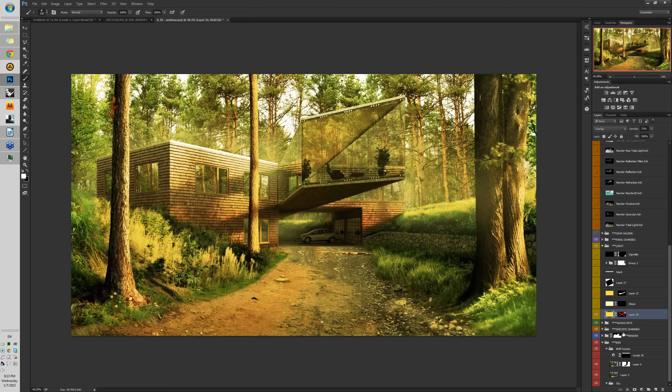First of all, there is this layer set to overlay mode with a lower opacity, like 70%. Then you create the mask, and you can easily, oops sorry, it's overlay, okay, and when you are in the mask, you take the brush and you can very easily paint the light. If this is just too much, you can lower the opacity and remove the effect from there, or draw it with some nicer values. Okay, so this should be done.

Then there are some little glows. As you can see, these are used mostly for the metal parts. So it's in here, and also some of them are on the little assets in front of the cantilever. What is very important is this light, which is very subtle.

Then there is a lens flare, of course. As the next step, I usually darken the bottom of the image a little bit with a little gradient, so we focus more on the upper parts of the composition.

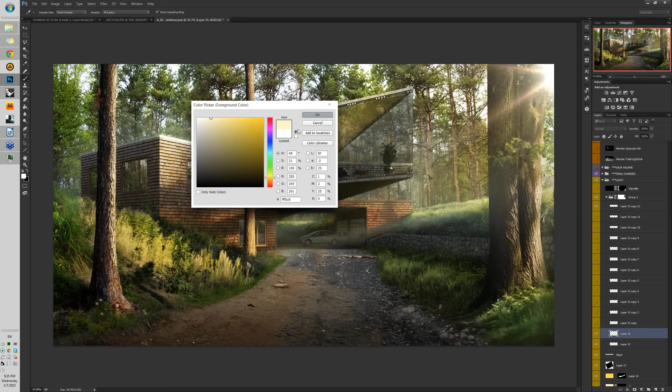And then I've got here the group, which holds some more layers. If I enable it, you can see there are some god rays coming through the trees. If I disable them, I can show you how they were created. Just create a new layer, take the brush, make it a little bit yellowish, and just paint the light.

Then you go to filter, blur, Gaussian blur, to blur it a little bit more, and then filter, blur, motion blur, and try to match the direction of the light. Here we can blur it more, and then you go to, let's say, screen or overlay, or whatever fits your image better. Lower the opacity to something really small, and if you just enable, disable it, you can see the difference.

And then, holding Alt, you can just create several layers, and some of them might be distorted to get sharper effects. Like that, and maybe with a higher opacity. So it really depends on what you want to achieve in the image.

I'll enable the rest of these. In the same way, I created all of these god rays. And then when they were created, as you can see, they are getting in front of the tree, but I want them behind. So I just create a mask for the whole group and paint some brush strokes in there, to mask them out.

Okay, and as the last layer for the light is vignette, and vignette is just a simple layer which is completely black. As you can see, opacity is 42. If I switch it back to 100, it's completely black. So if you just go back to 40 and enable back the mask, which looks like this, we are enabling the vignette like that.

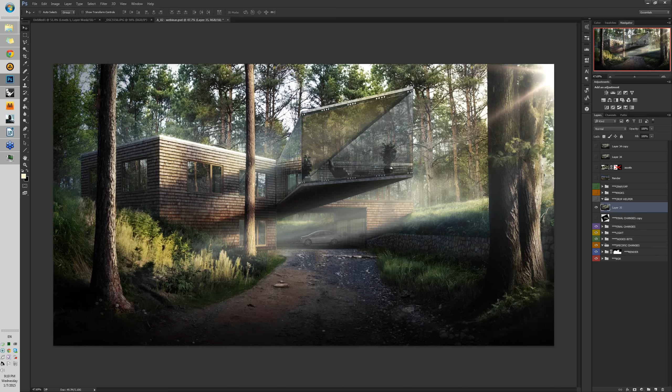And in there I just created some chromatic aberration for the edges, so it appears a little bit more like a photo, not like rendering, and it usually adds some more realistic effects. But remember, this is not going to add some realism when the rendering is not good enough. It's not going to save the rendering. It can only enhance it, but not save it.

So always remember to keep all the parts of your work really good, and do not just tell yourself, okay, I'll just do that in Photoshop, because then you will forget it, or maybe if you are lacking the skills in some part of the post-production, you won't have a chance to recreate the effect. For example, with the wooden shingles on the facade, I knew I could do that in Photoshop, but I wasn't really sure if the effect would be the same, so I decided to use the displacement for the rendering to get these really nice and sharp, dark shadows under the shingles.